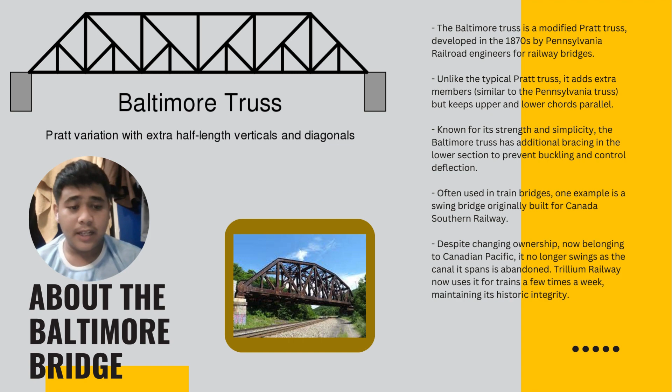Okay, next I will hand it to my friend, Abuza. Thank you.

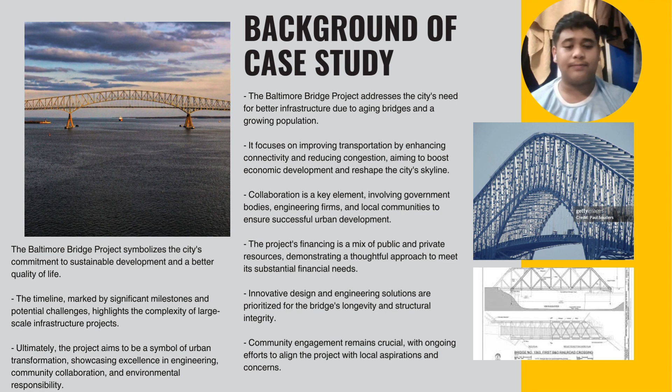Assalamualaikum warahmatullahi wabarakatuh. My name is Abuza bin Zari, and today I will present the literature review and theory of our project. So, the Baltimore Truss actually emerged around the 1870s, in the golden era of American railway expansion. So, it's not known where it all started, but engineers have agreed that it started in Ohio and Pennsylvania.

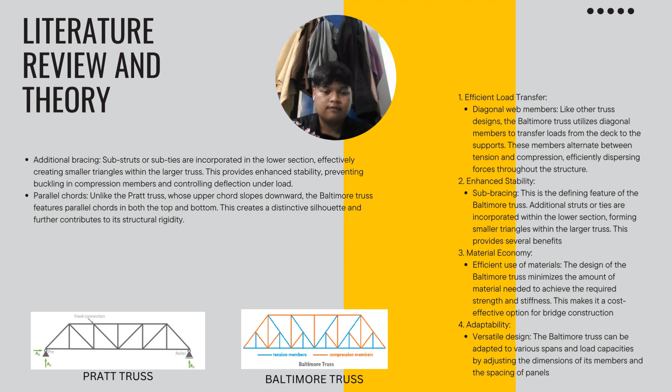The Baltimore Truss has efficient load transfer. The Baltimore Truss uses diagonal members to transfer load from the deck, so it efficiently disperses force throughout the structure. Second, the Baltimore truss enhances stability. The sub-bracing that we discussed earlier, the orange and blue lines at the smaller triangles, is the feature of the Baltimore truss. These smaller triangles provide several benefits.

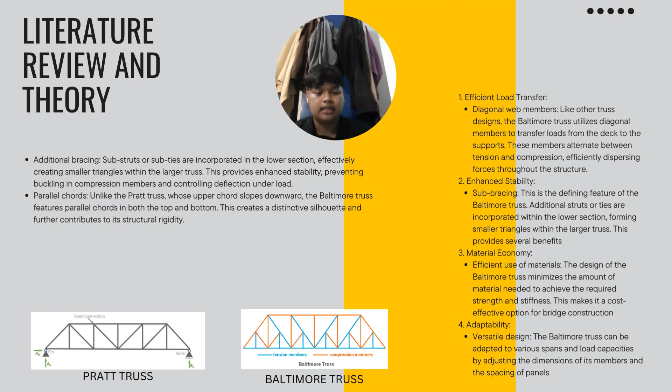And next, material economy. The design of the Baltimore truss minimizes the amount of material needed to achieve the required strength. And the last one is adaptability. The Baltimore truss can be adapted to various spans and load capacities by adjusting the dimensions of its members and the spacing of panels. And that's all for me.